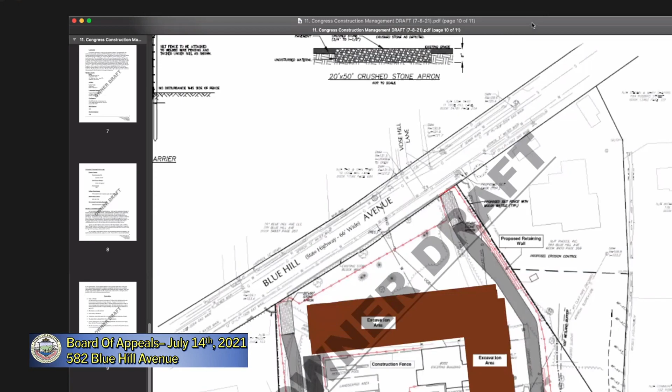Is it most appropriate to start with the actual plans included in this document, Mr. Chair? Well, I don't know, whatever makes sense to you. Okay, just show people what we're looking at. That probably makes sense to start there.

So what I'm showing you here, Mr. Chair, can you see that? Can everyone see that screen? Hopefully it's zoomed in enough. This is the sketch plan of phase 1 of construction. As you can see here, as I move down the plan, there's a red fence shown around the perimeter of the site - that's a construction fence. There's also a red perimeter fence around the garden complex here.

The area shaded in dark gray here is proposed construction parking, and there are stone aprons at both entrances to the site. This would be a temporary contractor's construction road here, and then marked in - I'm not sure what color you'd describe that as, some sort of brown - this is marked as the excavation area for the garage structure.

And as we move into phase 2 here, Mr. Chair, this shows the vertical construction aspect of the project. We have crane pads here next to the west building, in the front of the site, and then two adjacent to the north building. The construction fences remain, tracking pads at both entrances, and the construction parking.

As the project progresses, this will be converted from a temporary contractor's road into the final constructed road. And once the plan is - it's described further in the report - the construction parking area here, once the garage is completed, sprinkled, and certified by the town as safe for occupancy, the plan would be to move more of the construction parking, storage, and staging inside the actual garage. That would free up additional space around this area for deliveries and staging of materials in the area previously used exclusively for parking.

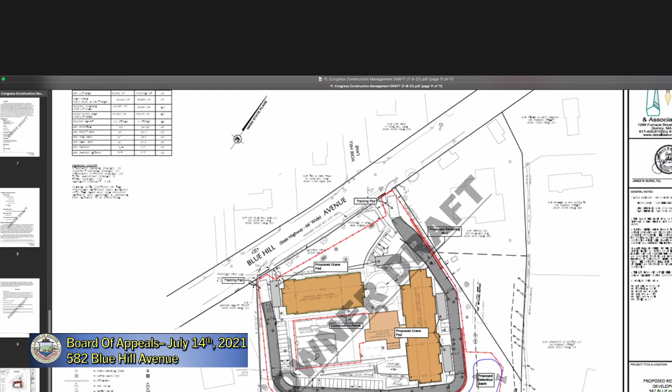Beyond that, Mr. Chair, would you like me to go through the report?

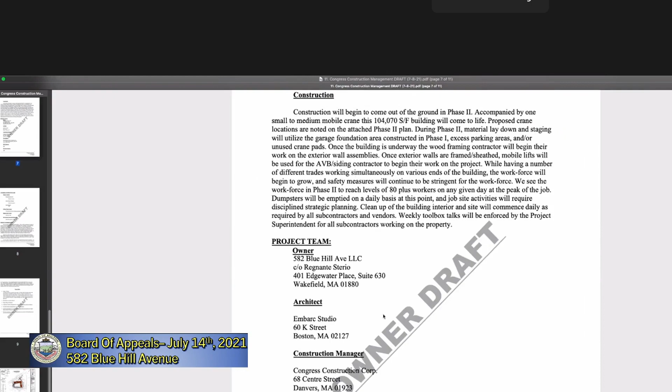Why don't you give us a sense of what the rest of the report represents and what kind of details are in it? Sure, I'll go back to the beginning if I may, Mr. Chair. So the construction management plan starts with a letter explaining who Congress Construction is and what they do.

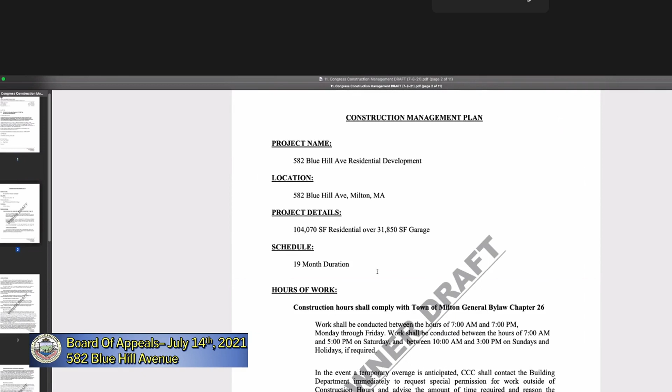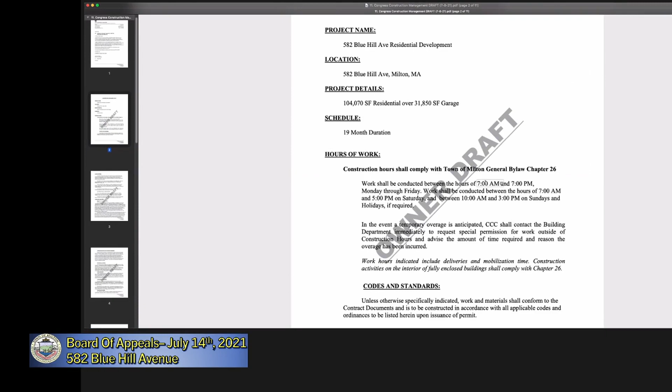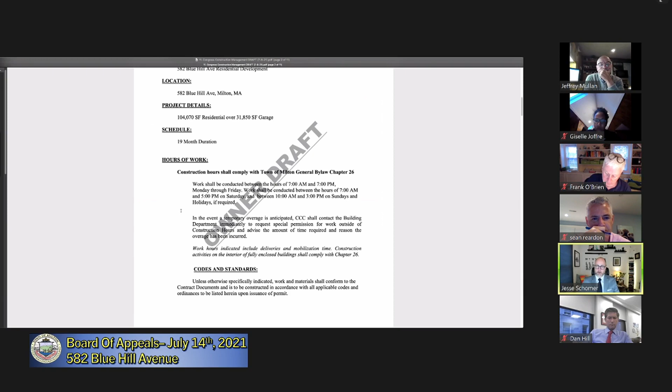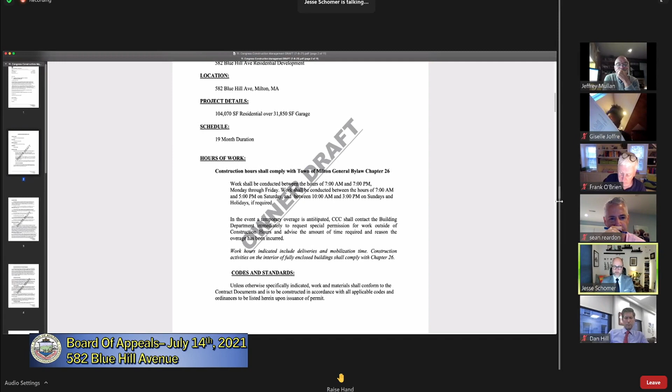Then it goes into the project details, listing the hours of work, specified to comply with the Town of Milton's General Bylaw, Chapter 26, dealing with construction hours: 7 to 7 Monday through Friday, 7 to 5 on Saturdays, and between 10 and 3 on Sundays and holidays, though we wouldn't expect much work then. Permission would be required from the town if work was proposed outside those hours, all in accordance with the town's general bylaws.

As the report moves forward, there's further detail about the scope of work and manner and methods of construction. I won't go into those in detail, I'll let the members review those for themselves.

The construction logistics plan proceeds with phase 1 describing how the site will be prepared, including erosion controls. There's a silt fence around the property, the construction fence, as well as the fence for the walled garden. The tree protection plan also contains its own tree protection fence around the front of the site, and I can show that if you'd like. At that time, that fence will be put in place along with all other protective measures required by that tree protection plan.

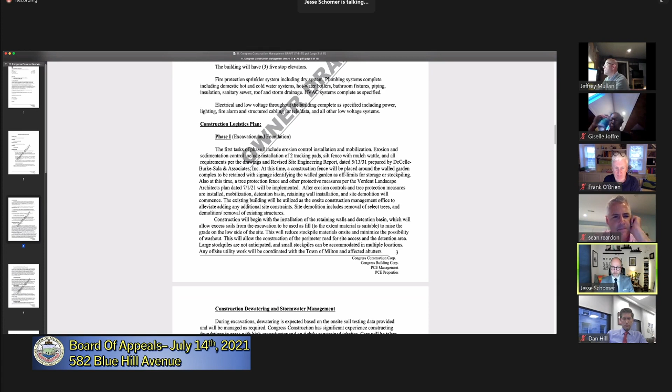Following that, the site demolition will begin: installation of subsurface drainage structures, excavation for the parking area, and the plan describes where stockpiles will be. It's not expected to have large stockpiles on the site, but to the extent smaller stockpiles are necessary, it describes where those will go.

It also covers where deliveries will be accommodated, and any off-site work, which was mentioned by Mr. Berkeley earlier tonight, is to be coordinated with the Town of Milton and any affected abutters. Mr. Berkeley brings up a good point regarding work in the road - we would also need to coordinate that with Mass DOT, since that's a state highway.

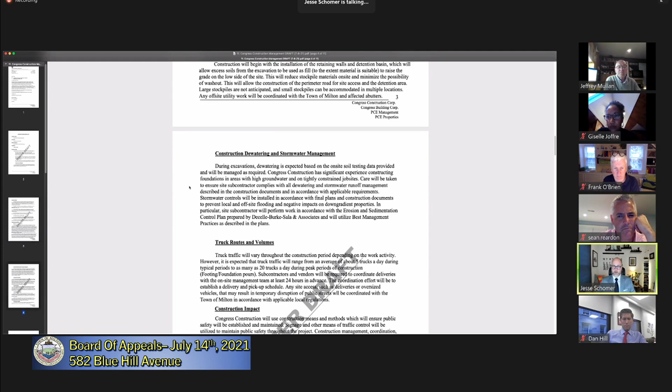Proceeding from there, the plan describes dewatering and stormwater management during construction, truck routes and volumes, and how construction impacts will be managed with respect to parking, traffic control, public safety, and construction management scheduling.

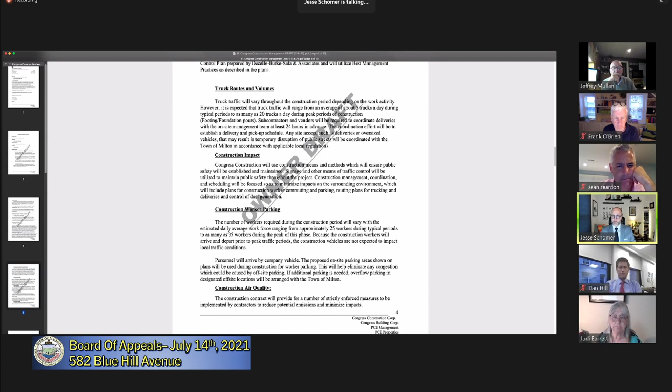There's a section dealing with construction parking. As I mentioned before, there's an area specified on the site. The plan also provides that if additional parking is needed beyond what the site can accommodate, we would coordinate with the Town of Milton to find an offsite location arranged specifically for that purpose, with the intent that we wouldn't have construction vehicles parked in front of the neighbors' properties, to the extent we can avoid that.

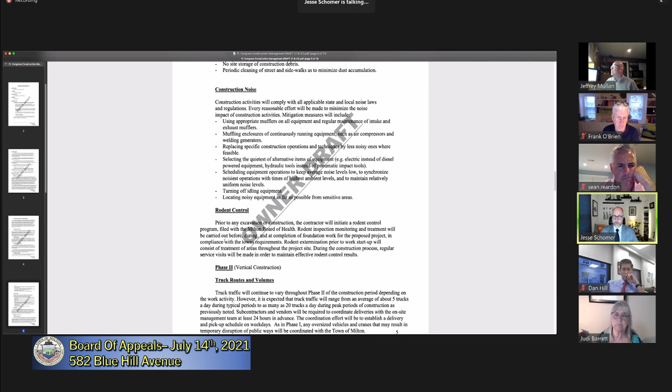The next part of the plan deals with construction air quality, such as dust control, construction debris, construction noise management, and rodent control. These are all details that could be fleshed out further in conditions of the project. For example, rodent control and dust control could be subject to plans submitted to the Milton Board of Health for their approval.

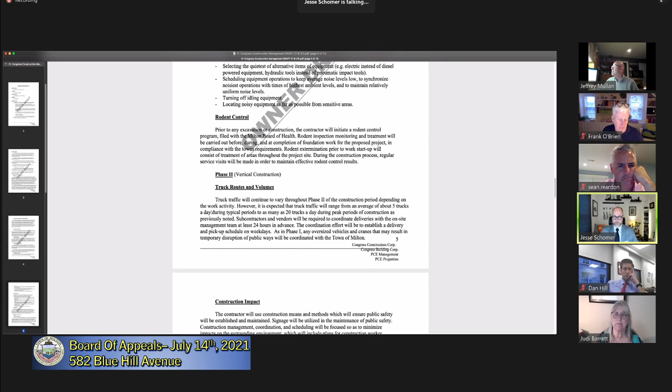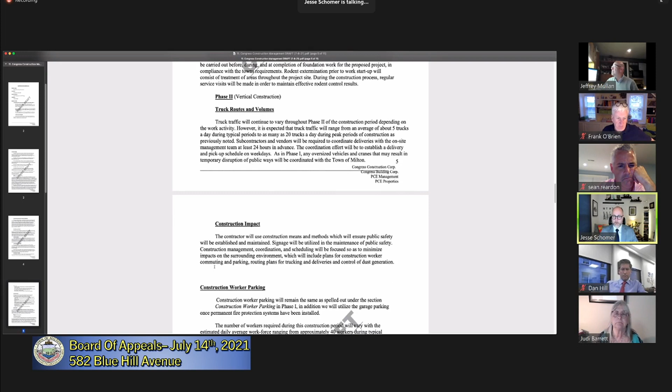The next stage of the plan discusses the vertical construction aspect of the project, where the building takes shape out of the foundations on the parking level and proceeds to completion of construction. The construction impact is more or less similar to the previous phase, as well as construction parking, air quality standards, construction noise, and rodent control - those would all be the same.

This section discusses the specifics of construction during this phase, and the number of workers anticipated to be on site. The same arrangement would apply with respect to parking - if additional parking is needed, we would arrange that with the town.

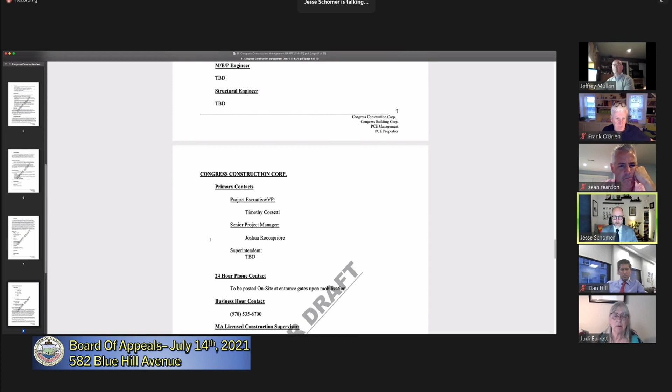The report provides contact information for the applicant, the architect Embark, the construction manager, the civil engineer, as well as the project manager for the project, the executive of Congress Construction. It provides that a 24-hour phone contact will be posted at the site, as well as a business hours contact, and the site will be managed under the purview of Joshua Roccapriore, who's a licensed construction supervisor.

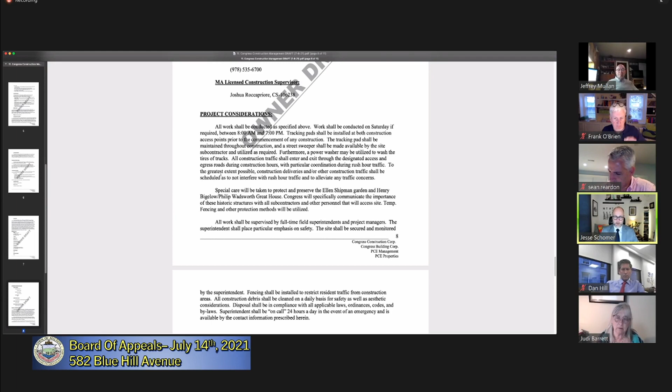The remainder of the report discusses further considerations regarding construction impacts, traffic, and parking, protections for the walled garden and the portion of the existing house that will be retained as part of the project, as well as weekly meetings with subcontractors to ensure everyone understands those structures are to be preserved, and all reasonable methods taken to ensure nothing happens during construction to damage either the garden complex or the house itself.

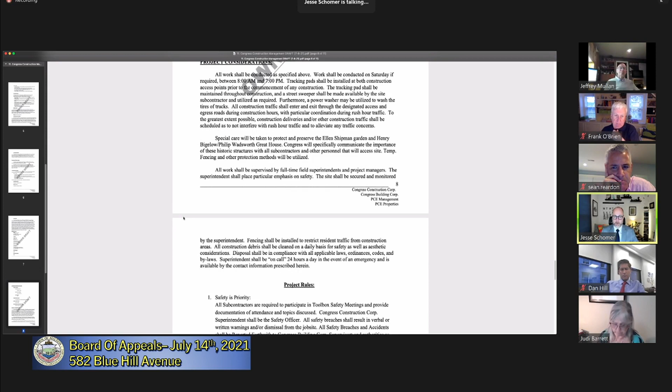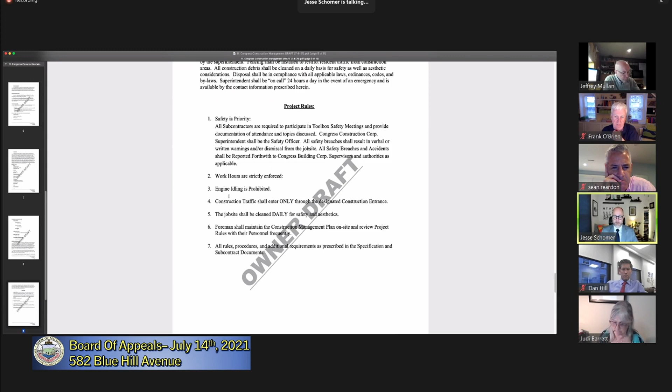The remainder is project rules regarding safety and engine idling, construction traffic, and cleaning of the project site and things of that nature. That's the extent of the report, Mr. Chair, we can answer some questions if that would be helpful. Questions from the members?

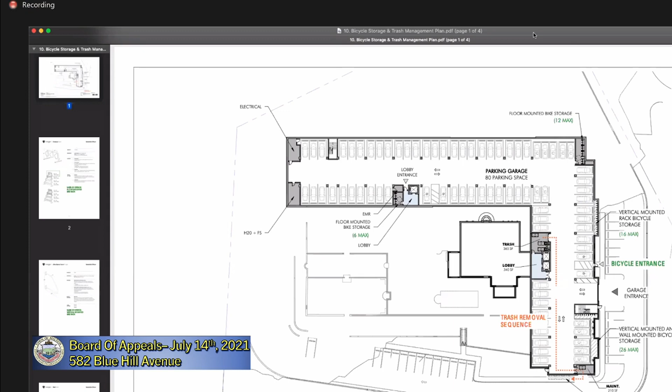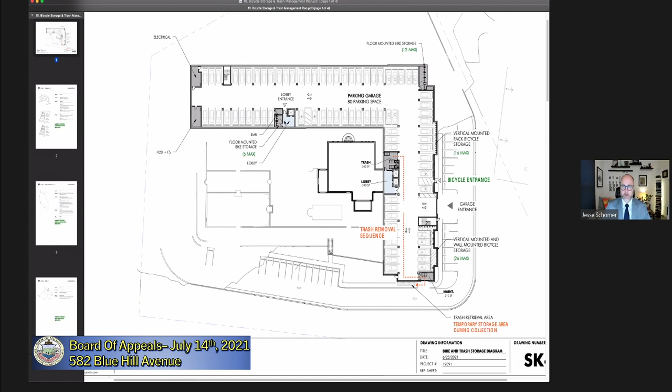Okay, so this is our trash management and bicycle storage plan. Can everyone see that? Yes. This is the garage level of the site, with the L shape of the existing mansion here. We have two dedicated bicycle storage rooms, one here and one in this corner. Embarc has designed this with as much compliance with the BPDA design specifications as possible, providing accessible locations for bikes to be stored on the floor. This would store 12 bicycles, this would store 6.

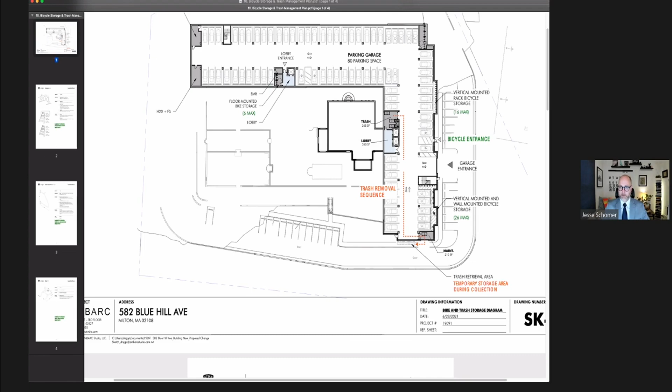In addition to those two locations, we have spaces along the wall here and down here providing an additional 16 plus 26 bicycle storage spaces. That storage is not maxed out at that point - we've designed this with some additional space in mind between the bicycles. More storage can be added if needed, but we thought this was an appropriate number to start with and assess demand once the project is up and running. The vertical storage areas would allow for additional storage racks, though bicycles would be closer together, which is challenging for getting them off the walls - that's why we designed it with a little slack space.

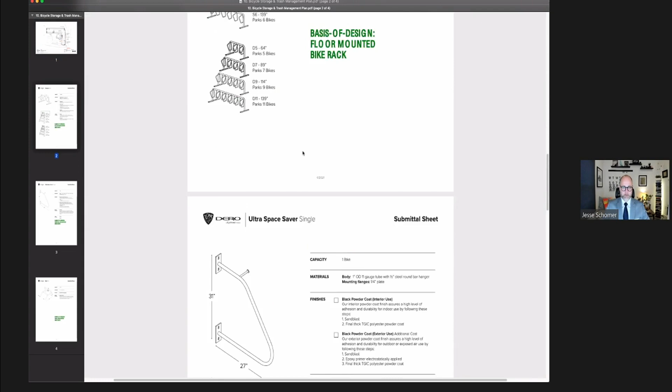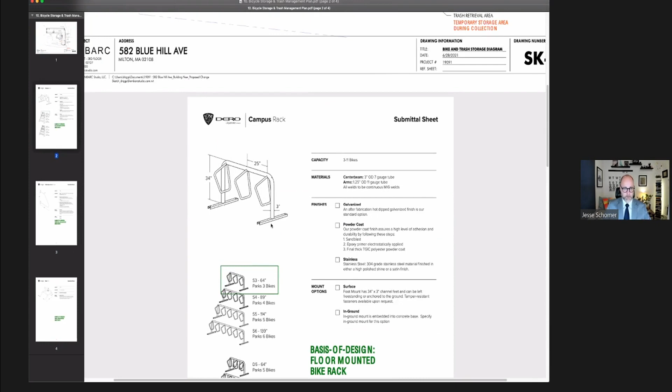This plan, in the next few pages, details the bicycle storage racks. These are just some ideas Embarc has in mind for the wall rack, the space saver mounted racks, and some of the racks within the floor storage rooms.

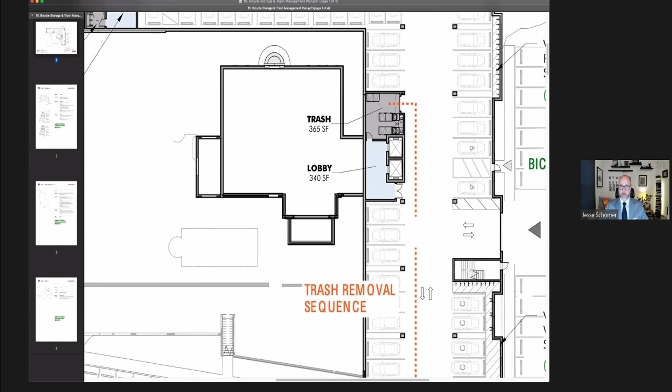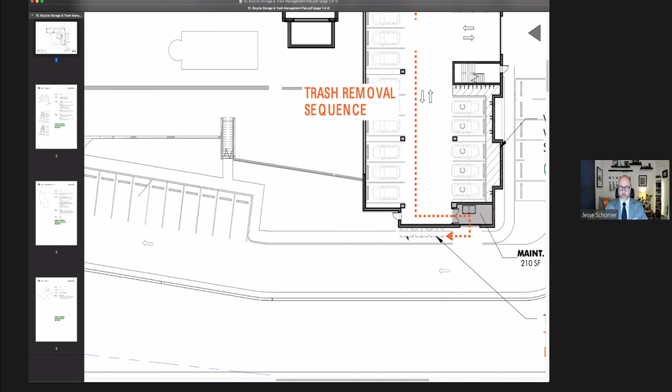The plan also shows detail for the trash storage room here. As mentioned, it has room for rolling containers as well as dumpsters. The plan is for trash and recycling to be rolled out by site maintenance from this room, through a double loaded door at this location down to here - this is a maintenance room - and another double loaded door at the bottom. They would be left on the sidewalk here for collection at the bottom of the north building, and once that process is complete, rolled back into the storage room. That's the idea for trash management and operations in the garage. I'll pause here for any questions.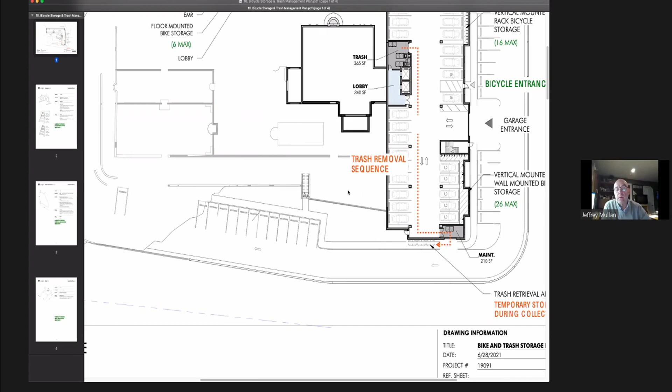Is that door a maintenance door down at the bottom? That's right, Mr. Chair - this room shaded in gray is a maintenance room at the bottom. And that's all at the same level? Yes, yes it is, and it's all done manually. It's not being done by truck?

Yes, it's being done manually. It would be done by staff. So how big are those dumpsters?

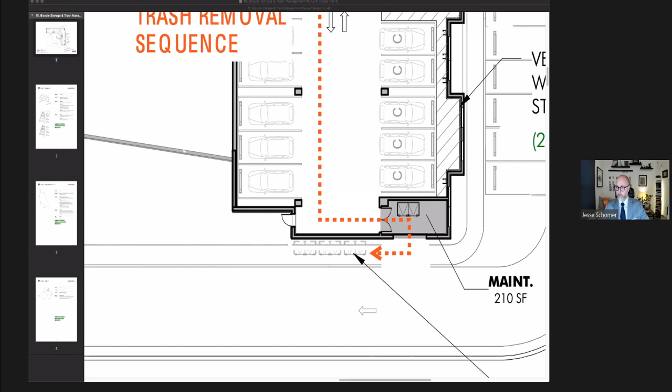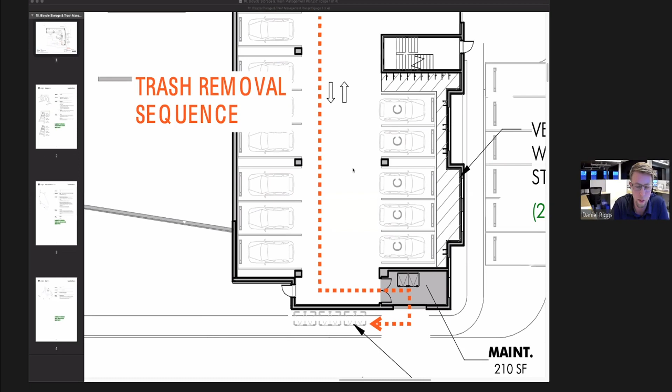I would turn that over to Dan Riggs, he's the one who designed these rooms. Dan, do you have any... Yeah, I can answer that. Those are intended as 2 cubic yard trash dumpsters, and often they can be moved by maintenance staff using a sort of a caddy system. It's like a small motorized vehicle that they can wheel with a hand lever, and allows them to easily manipulate those and rotate them, move them around the spaces they need to.

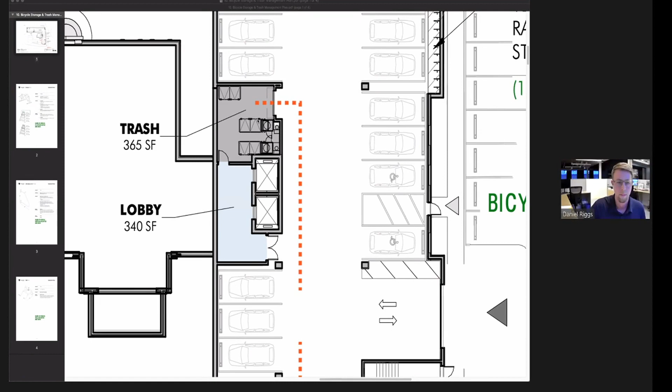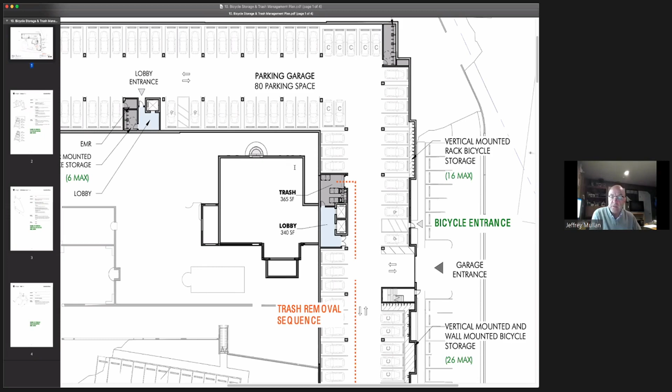Thank you. Can I ask, on the bicycle accommodation and the number of bicycle spaces that have been provided, was thought given to the marketing plan for the type of person that would be living here, and some evaluation or estimation done as to whether or not the person who lives there is also the person who would be riding a bike? Or is it simply a matter of saying we need a bunch of bike spaces because the peer reviewers and the town and the board is bugging us about multimodal applications, and we'll try to make some accommodation for that? I know that's a bit crude, but I'm wondering where on the spectrum the science is on how many bicycle spaces are actually needed.

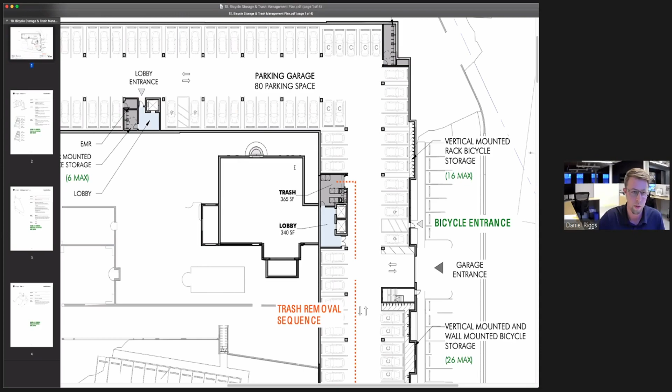Dan, do you have any thoughts on that? So here we're showing a total of 60 spaces, which we think is appropriate for the location and the ability to connect to other means of infrastructure. The BPDA number is 1 to 1, which would put us at 86 spaces, but we don't think it's quite the same scenario as within the city of Boston. So we felt 60 was an appropriate number for the site. And as Jesse specified, we could add additional ones that could be deeded to a parking space and associated with it directly at that wall of the car space, for instance.

All right, thank you. No questions. Mr. O'Brien or Ms. Joffre, questions?

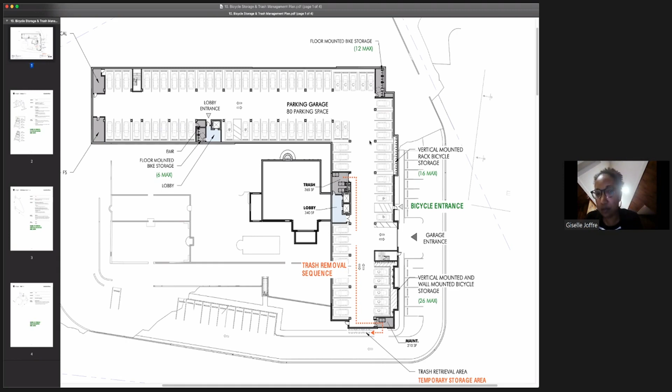Thank you, Mr. Chair. With respect to the trash, was there analysis done on how much trash you think will be generated? I'm assuming weekly, this is supposed to maintain or hold a week's worth of trash for the entire complex. I'm not a trash expert, but it seems small to me.

I can answer part of that question. So we program our trash rooms based on our typical programming logic for multifamily buildings, and on a building from anywhere from 100 to 150 units, we typically include about 400 square feet of trash storage. So here we're including 365 square feet in that one room, and there's also accessory storage in the maintenance room at the other southern part of the plan. So they can be managed in a variety of ways and emptied at certain intervals throughout the week. We don't really decide that part; we program the spaces based on kind of industry standard trash room sizes.

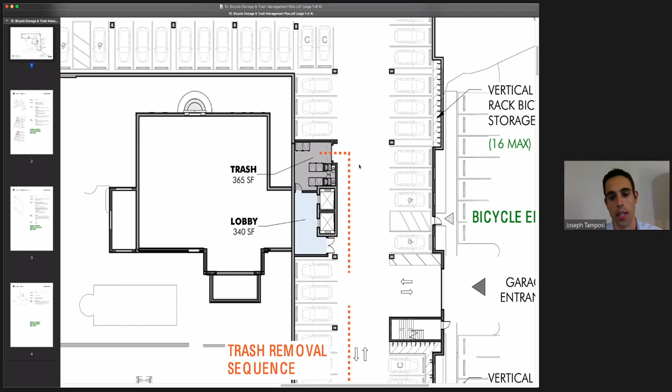And I can add to that. Typically, for a building like this, trash would be done twice a week.

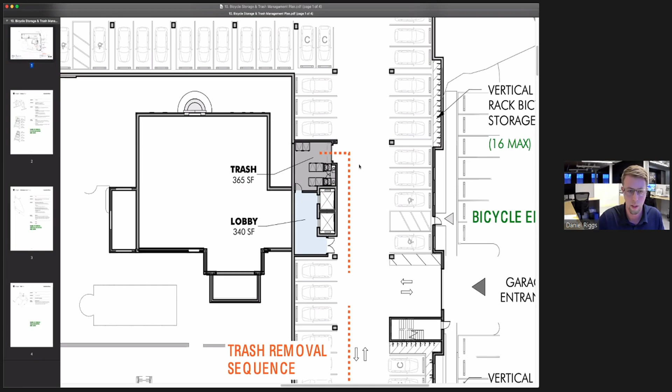Okay, thanks. And there's no chute system at all, the residents just bring their trash down to that area? Is that how it works? So there is a trash chute system for this room here. You can see these pieces—it's a little hard to read on the line work here, but the chutes are essentially these pieces that go and correspond to the stacked trash rooms above them. So generally, the residents don't have access to this main trash room at the garage level, but each floor above this would have access to the chute, which they could drop their trash down into this room.

Okay, got it. Everyone will be using the chutes, even if you're on the other side of the building. You'll walk to that one particular side. You go to that side, exactly. Yeah, okay, all right, thank you.

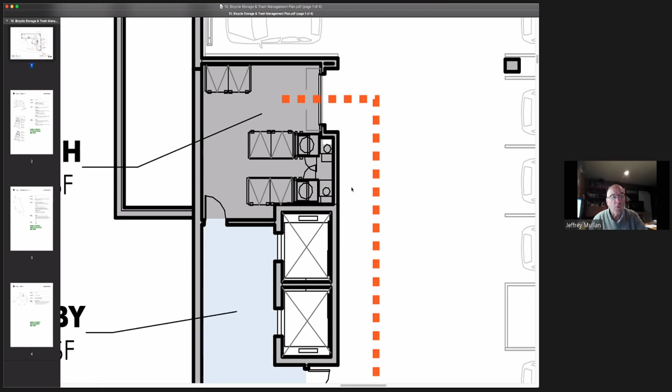All set? Yes, thank you, Mr. Chair. Mr. O'Brien? All set, Mr. Chairman. Okay.

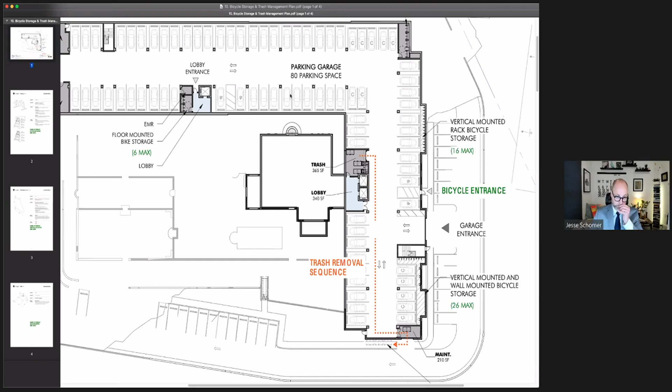Mr. Schomer, anything else? Just one thing further to add on this issue of bicycle storage, Mr. Chair. In addition to the spaces that we're showing in this garage, the landscaping plan has an updated detail for the entry circle, and it's now showing 4 additional racks for guest bicycle storage. That was requested by Mr. Bomer, and that would allow storage for 8 additional bicycles.

Other than that, Mr. Chair, I have available the tree protection plan, and I would be happy to put that up. Please.

I see that Blair Hines is on the line, our landscape architect. I wonder if he could go through this, as I'm sure he could comment on it much more conversantly than I could. Blair, are you available? Can you hear me? Yes.

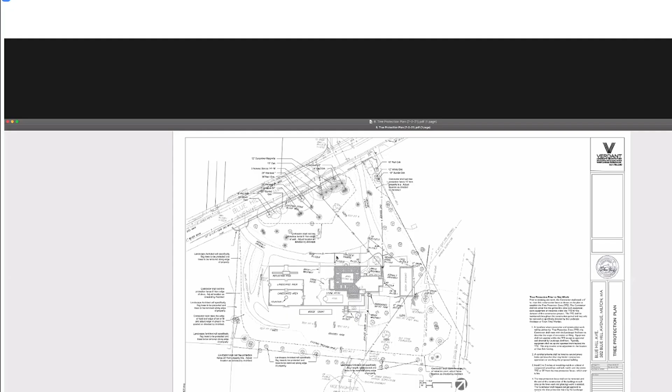I don't have access to the visuals, but regarding the tree protection plan, the key elements are first to fence off all the trees, not just around the drip line, but areas of trees, to limit access of construction equipment or storage of construction materials. Secondly, it's very important for trees close to the construction area to have irrigation, because although they'll lose a lot of their root system through construction, the root system of a tree is meant for droughty conditions. If a tree loses a significant portion of its roots, say 40%, and you provide supplemental watering, the tree has the ability to survive. After this, the irrigation system can help it start to rebuild its roots into the new landscape area. I'm happy to answer any questions the board may have.

The connection for Mr. Hines is not good, I didn't catch a lot of that testimony. I'm sorry, let me start again. Is this any better? It is. Is this better? Yes.

My apologies. What I was saying is that the key elements of the tree protection plan are to fence off areas where the trees are going to be preserved, and the fencing's purpose is to limit construction vehicle access or storage in those areas. Along the edges of the tree protection zone, where there are existing trees you want to preserve, those trees will have lost a significant portion of their roots, could be 20%, could be 40%. The tree's overall root system is really there to support it during droughty conditions, so since it has a more limited root system, you want to irrigate it with a temporary irrigation system, providing water so those trees aren't failing during, say, 2, 3, or 4 weeks of droughty weather. That's another very important element of the plan. I'm happy to answer any of the board's questions about the plan.

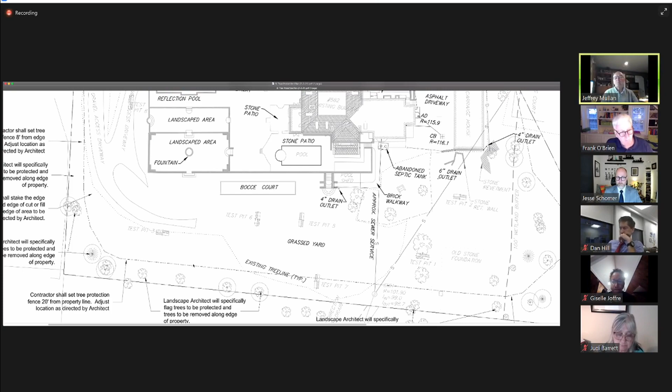I see. Questions from the members? No questions from me, Mr. Chairman. Ms. Joffre? Or me, thank you. I don't have any questions.

Let me ask Mr. Hill if he's got a question, anything he's heard from Mr. Schomer. Before I do that, Mr. Hill, Mr. Schomer, is that complete? I don't want Mr. Hines to go away because we may get questions. I just haven't had the mic on, my apologies. No, I see you there, that's fine, that's perfectly okay. I just wanted to let you know we may have a question for you, so if you could just stay there. I shall be on the phone. Mr. Schomer, are you finished with offering testimony tonight?

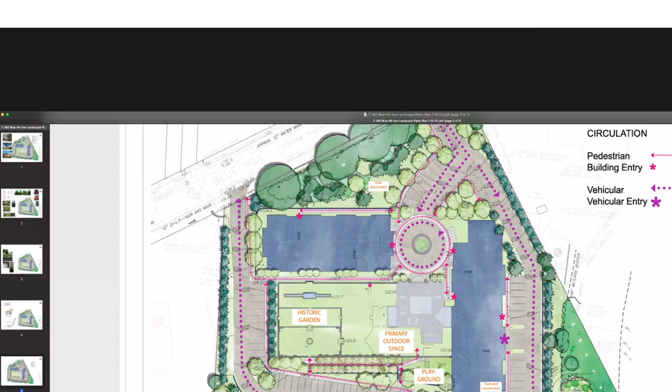If the board members would like to see the pedestrian circulation plan, I can put that up as well. That was a request of Mr. Zawinski. Sure. Mr. Hill, we'll get to you after Mr. Schomer finishes with us. This will be my last demonstration, Mr. Chair. So this is sheet L5, and Blair can talk about this some more if I don't cover everything. This plan is intended to basically show the circulation for pedestrians and vehicles all around the site.

We have here the front entrance, with two ways, entrance and exit. We have the dedicated loading space here, vehicles come down here for drop-offs. The larger purple dots and arrows show vehicle circulation through the site, this is exit only here. The smaller pink arrows show pedestrian circulation around the building. We have access to what we hope to be a multimodal path once Blue Hill Avenue is upgraded, if that plan comes to fruition through the state.

The sidewalks connect to the entrance of the site here and here. Pedestrians can access the circle through here, and there are pavement markings to show that pedestrians can go around the circle.

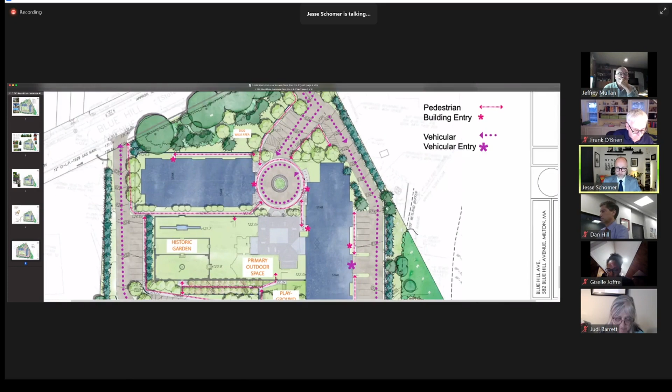The bicycle storage I mentioned is shown here for 4 racks at the entrance of the circle in front of the north building. From there, pedestrians can go around the site in every direction, into the gardens, the parking areas, around the parking areas, into the playground and outdoor space, with entrances to the building provided here and here.

Down here is the trash and maintenance access area that we already showed. Stars are building entry points for pedestrians around the north building here, and the west building here. That completes our presentation, Mr. Chair.

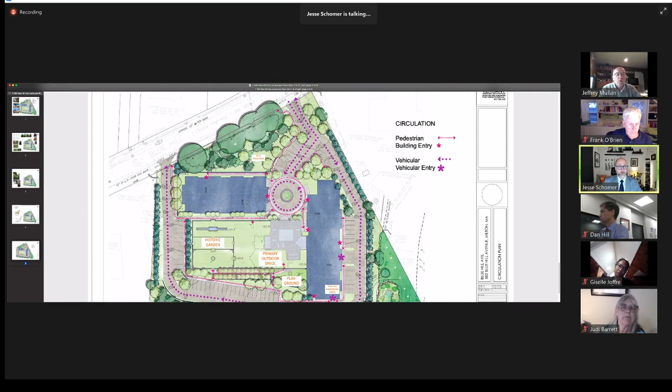So this is designed to accommodate MassDOT's plans for 138? That's what we have in mind. As you know, Mr. Chair, there currently are no sidewalks on this portion of Blue Hill Avenue, so once the project gets built, it will be a sidewalk that's not really leading to any place.

Other than at this location to the waiting area for the bus. But the hope is that if that project does come to fruition, the sidewalks we're providing here and here would allow this project to be accessed from that multimodal path, which would be a great improvement for the neighborhood and the site, allowing residents much greater accessibility to the neighborhood through bikes and pedestrian access.

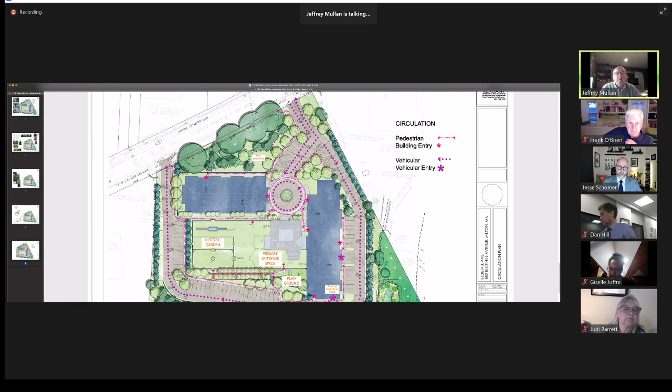Are the sidewalks on the applicant's property or within the limits of the state highway? The sidewalks we're showing here, this is the limit of the property, and that's where they stop. Where's the limit? This dark line here, Mr. Chair. So there's a sidewalk.

But isn't the sidewalk on the outside of this? The sidewalk, the gray area? That's right. The gray area is actually the existing granite block wall along there. So I'm wondering where the sidewalk is along 138.

I think that's a question that would really need to be worked out with the state. What we're trying to do is show that the design of the landscape within the project area is being responsive to this, and of course we would be responsive to any direction, either by the town or the state, in terms of a sidewalk along the edge of 138.

Yeah, the wall's in the right of way though, right? That is correct. So you're not touching the wall? Well, there would be some relocation in order to create the width of the access point off of Blue Hill Avenue—some of the wall would be removed and one of the brick piers would be removed. The idea would be to open up an opening in the wall for the pedestrian access, and then reconstruct it in kind so the end result looks thoughtful and as close as possible to as if it was always this way.

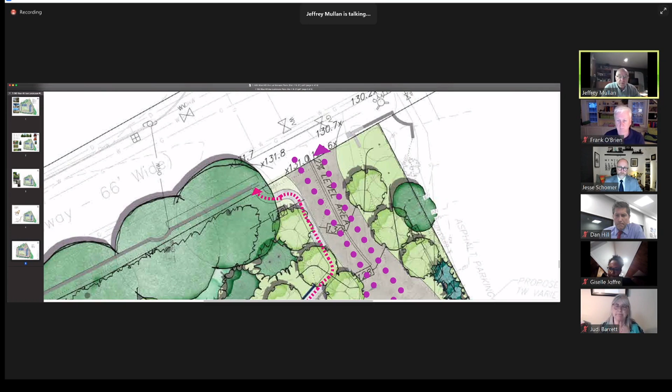Let me ask the members if they've got questions on the pedestrian plan. Mr. O'Brien? No questions from me, Mr. Chairman. Ms. Joffre? None from me, thank you. Mr. Zawinski, questions on this plan?

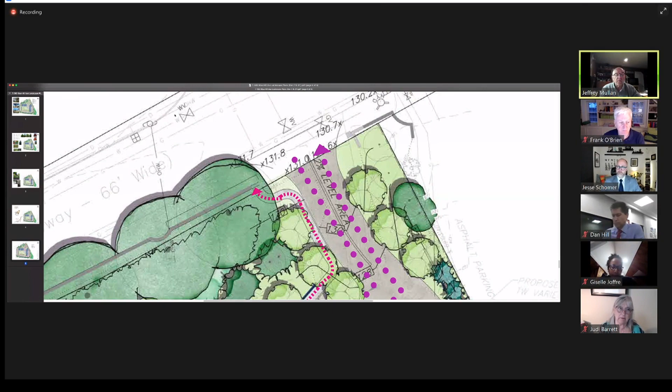I would have to give this a little bit of a closer look. It makes intuitive sense to me, the pedestrian circulation component of it. I don't think this is a holding-up detail on the level of some of the other stormwater and construction management issues. I'd like to get a better idea of what the signage is going to be at the entrances, just so we know they're clear, concise, comprehensive and coherent for people. That's a minor detail, just something the applicant should be aware of.

Like I said, I want to take a closer look at the plan. I know in previous comments I had mentioned that it would be great if that waiting area were behind the wall. I'm having a tough time zooming in, so I don't know if that waiting area is behind the wall or in front of it, but maybe something a little less diagrammatic could display that. Again, from a safety point of view, the plans for 138 are ambitious, and we're all crossing our fingers and doing our best to get them implemented, but that may not happen before this project is built, and we want to make sure kids waiting for the bus are nice and safe.

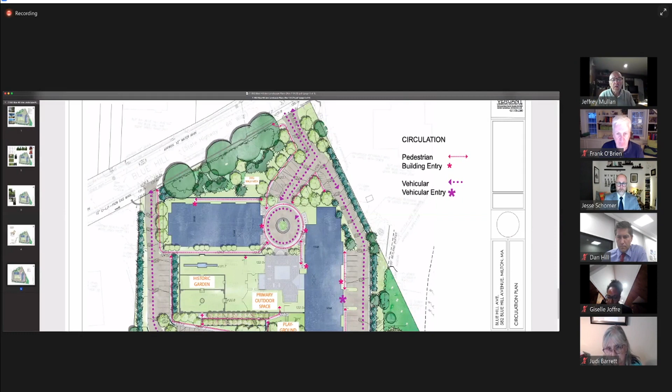But otherwise, go ahead. Like I said, I need to give this a little closer look, but it looks pretty okay right now. I may have further questions after review. I think leveraging the wall is a great idea for pedestrian safety, and saving the wall is important. And I think MassDOT's multi-use path is a number of years away, so those are three data points to at least think about and work around.

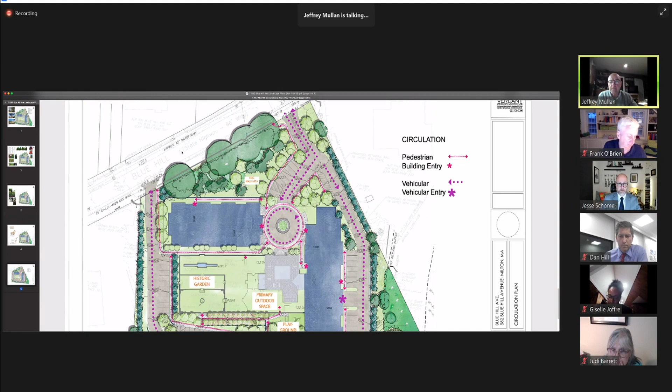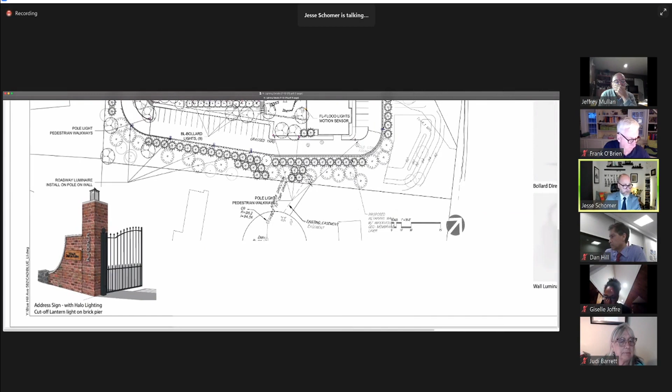This is the lighting plan that we provided. There are some color indications of pole lights, in-grade lights, bollard lights, and wall-mounted lights. The signage is in the bottom left corner of the plan shown here. At this point, we're proposing a pretty modest indication of the address of the property, and the name is yet to be determined, but if we zoom in very close here, we're proposing something along the lines of 'The Residences at Shipman Gardens.'

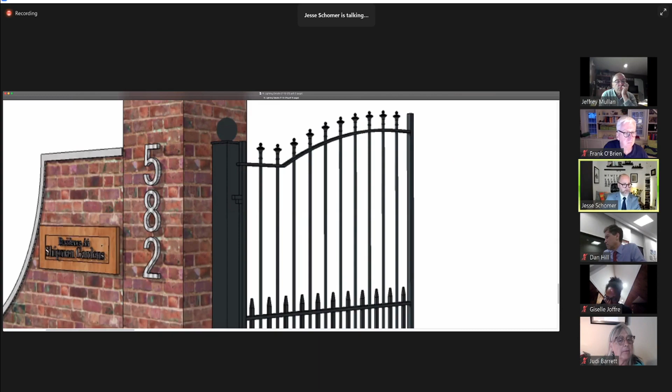Is that the existing wall or is it a new wall? I can speak to that. We believe one of the piers can be saved, which is on the Delphi side, and the idea would be to save that and have it abut the granite wall along that edge. Yeah, okay, thank you. Questions on that? Good, I'm sorry, go ahead, Mr. Hines. No, please, questions from the members?

No questions from the members? Mr. Zawinski? Ditto, we did get these plans the other day. I have not had a chance to give them a very close look, so I apologize for that. But again, saving that pier and a nice, modest but clear sign is nice. So I'll give these a closer look, but yeah, looks pretty okay right now. Thank you. Mr. Schomer? Is that all from us, Mr. Chair. Mr. Hill?

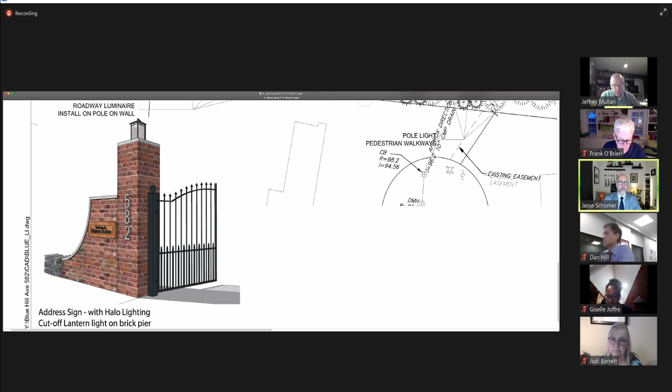Yeah, thank you, Mr. Chairman. I had a few questions on some of the plans that were just put up on the screen. Just starting with the tree protection plan, there appeared to be a fence shown on the plan along the rear property boundary. It looked like it was set back 20 feet. I think there was a notation that said it was going to be set back 20 feet. So I just want to clarify from the applicant that the intent here is to basically limit construction approximately 20 feet from that rear property line. Is that where that fence, that barbed wire fence would go?

Yes, that's the intention. So a lot of times on a project like this, you try to set the tree protection fence advantageous to the trees. That also includes the fact that at some point in the construction, you have to blend the existing conditions in with the proposed conditions, at which point the fence would be removed and then the landscaping would happen. But the idea, as you would see in the notes, is that that would have to be something the contractor specifically states. He has to operate his equipment from beyond that fence line, and then you kind of blend new grading and a lawn or meadow or plantings in with the existing. So the idea is to be as gentle and careful as possible, and that's what we try to incorporate in our notes.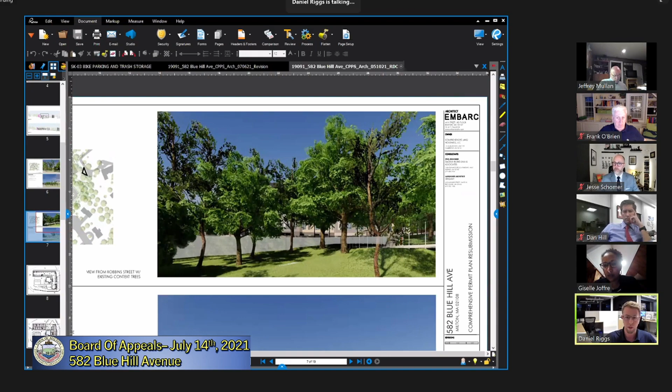Is this whole area right here going to be built up, or is it going to be graded down? So is the fill going in there such that it's going to be higher, and then everyone on this side is going to see an increase? Like if we were looking at the carriage house today, it's actually going to increase a height, the height is going to be higher.

Mr. Chairman, before we go into that, perhaps Ms. McGrath might be able to -- on the set of plans I have in the lower right-hand corner, there are numbers like A000, A020. Perhaps if Ms. McGrath has access to the same plans, she could give us the number so we're all looking at the same thing. Sorry, it's A010 architectural site plan, dated May 10th. Okay, I have that. I just want to make sure I'm looking at what you're looking at.

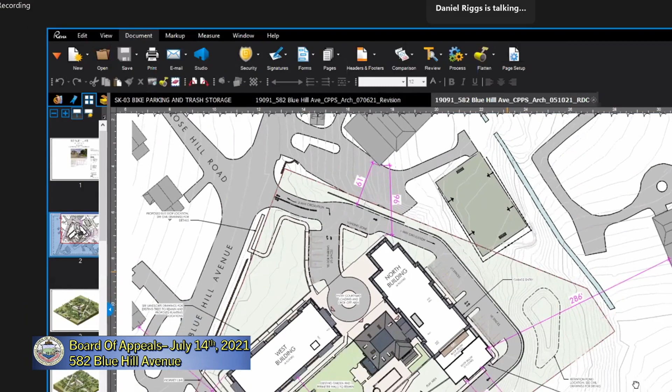This is probably a question better answered by the civil engineer in terms of how the site is graded and the retaining walls at that point. But I can show you the architectural site plan here, which is really just meant to be a coordination plan between the different disciplines to help show it all in one place. I believe this is the area Ms. McGrath is referring to. Yes. But again, that is shown in greater detail on the civil engineering plans.

So I don't know, are those up on the website as well for me to look at? They should be, I'm not the expert on what's on there. Okay, so is there a civil engineer on the phone who can say what -- and again, I'm not trying to be difficult, I'm just trying to understand. It may be that viewpoint you showed, at 582, it's because the grade is coming down. If that's the case, can you just explain that?

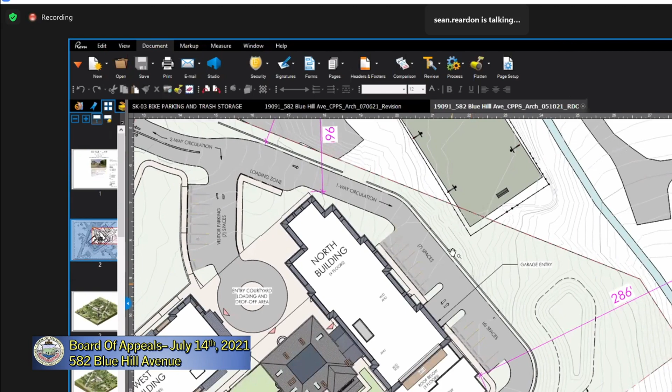Mr. Chair, I can perhaps help with that. So just for reference, the entry to the proposed garage is at elevation 112. And the elevation at the back of the existing carriage house is about 114. So the actual entry to the garage is going to be about 2 feet lower than the existing grade at the back of the carriage house.

Okay, and so the fill that's coming in will just be because right now there's just a slope down, so you're going to just fill it in and put the retaining wall on the outside. Exactly, yep. To elaborate on what Sean said, we're essentially leveling this to create a level area for this drive surface to surround the building at that point, and have the maintenance access and drive access to the building fairly co-planar.

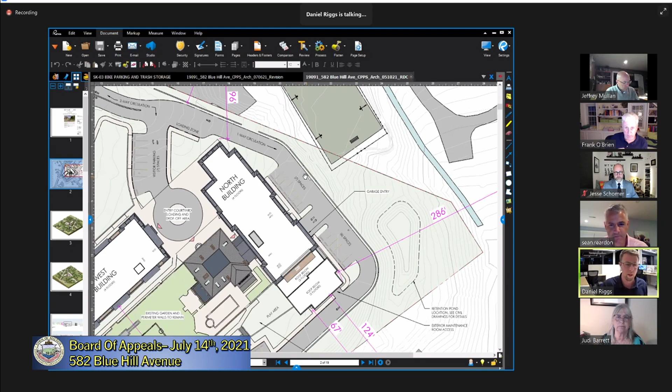So that involves lowering some areas and raising some areas towards the rear, whereas we're lowering areas more towards the drop-off area of the site. So in the rear, what is the existing elevation now and what will it be? I know this is probably online, sorry to take up time for something that's probably online.

So the elevation is location sensitive. What I can tell you is at the back of the carriage house, it's about elevation 114. At the front of the carriage house, it's about 116. And the grade falls off as you get away from the carriage house towards the property line.